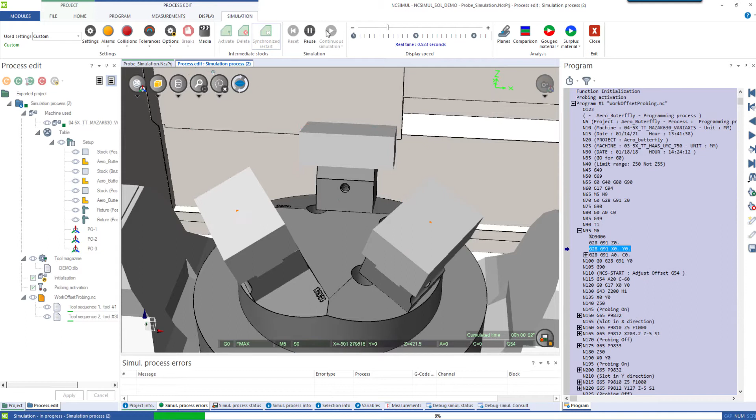To increase productivity and reliability, CNC programs perform more and more probing operations. The programming of these operations can be a nightmare due to complex cycles with many parameters. NCSIMUL allows for the development of the probing toolpath and protects these very expensive tools.

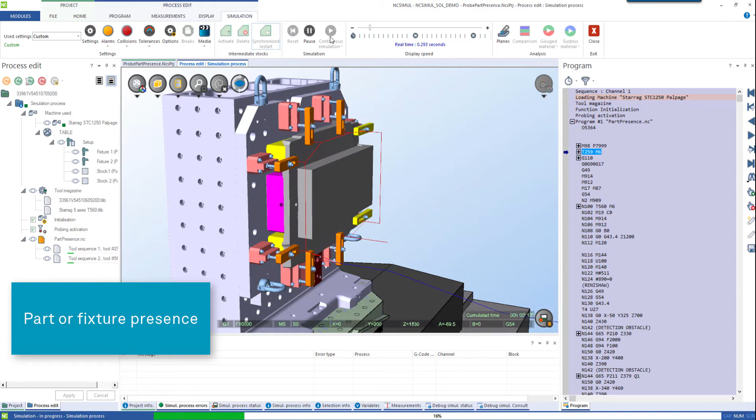It supports any kind of probing macros like Renishaw, Blum, CNC Builder, Machine Tool Builder, or anything written by the customer. By decoding probing macros with the same exact logic of your machine tool, it is guaranteed to send a safe program out to the shop floor.

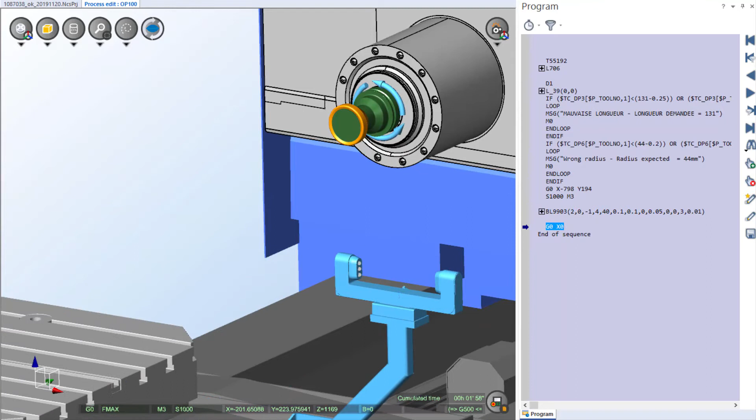NCSIMUL is very useful to troubleshoot probing operations such as work offset adjustments, part or fixture presence, tool offset adjustments, tool breakage detection, and in-process inspection. NCSIMUL can also simulate any type of probing devices like multi-ball probes, cubes, cylinders, discs, and lasers.

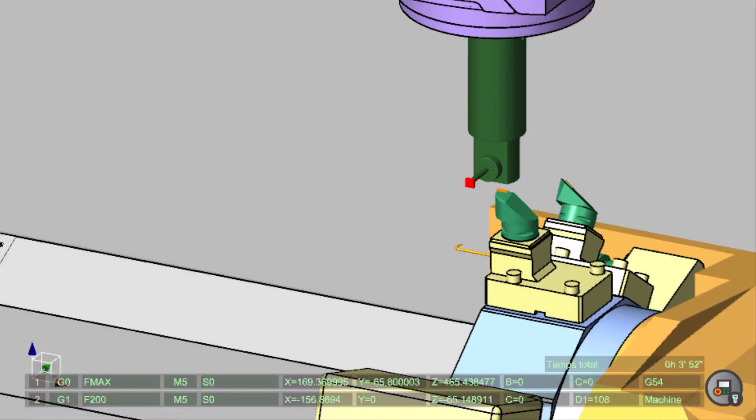The probing activation function allows for the calculation of the contact point during program decoding. Opening it gives access to the probing report, where a list of contact points for each probe used in the program can be found.

For each contact point, there is information about the element in contact, the program name, position of the machine axes, list of macros called, and 3D and program windows showing the block of each measurement point.

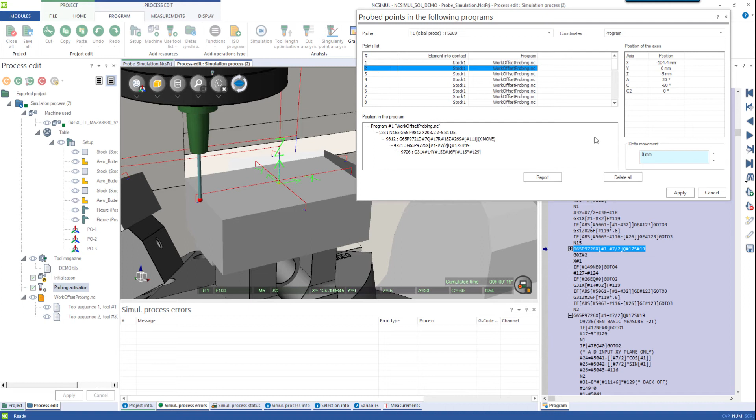Unlike in a simulation where everything is perfect, it's possible to define some deviation to see if the probing reacts correctly. Here, -2 millimeters is entered on the first two contact points to see what happens when the rough stock is smaller.

After decoding, the work offset adjustment can be verified. In the status window, the work offset values before and after probing are shown.

In the variables window, you can monitor the calculations of the probing macros. In this case, the Renishaw output variables are displayed.